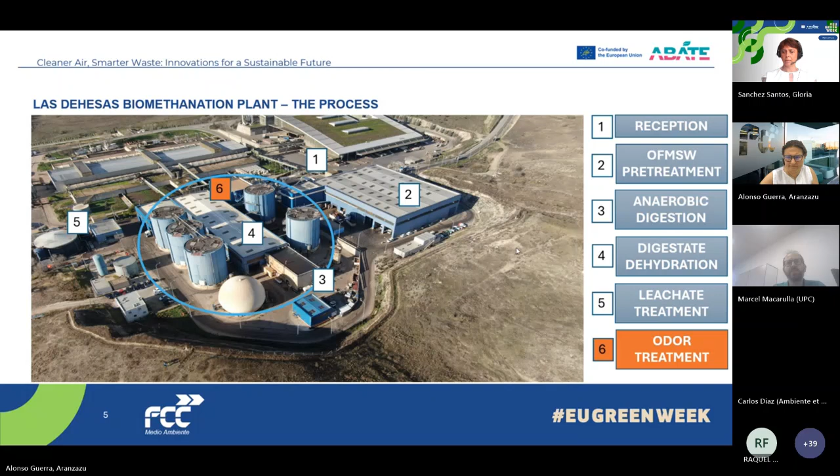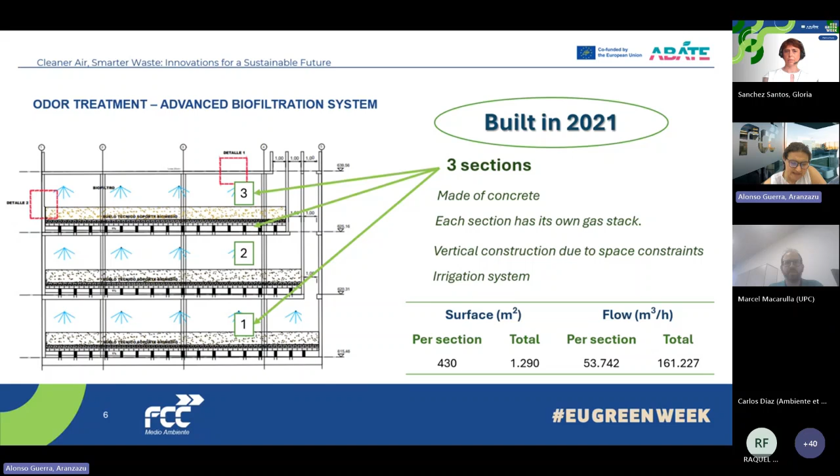The biofilter is an advanced biofiltration system and was built in 2021. This was a City Council of Madrid project to improve the deodorization system of the Valdemingómez facilities. The biofilter is a concrete building with 3 floors or sections identical in surface area and treatment capacity. The total surface area is about 1,300 square meters, with a capacity to treat up to 160,000 cubic meters per hour of air.

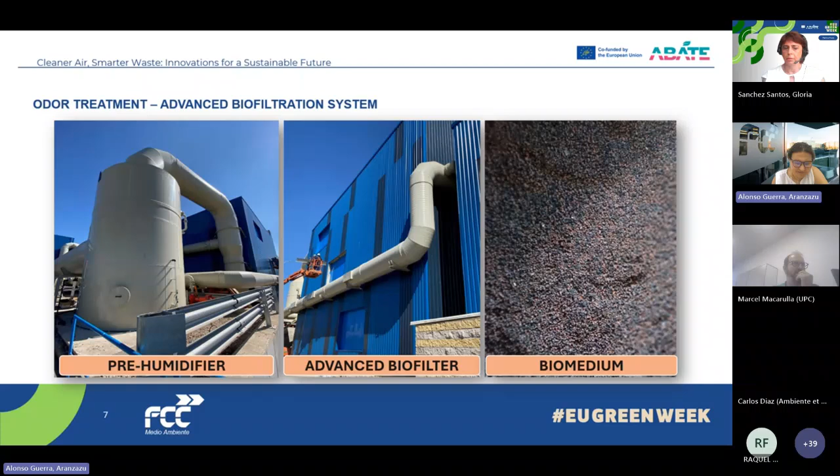The stream of air is extracted from the most problematic areas of the plant and first humidified in a scrubber to ensure that the air arrives in optimal humidity conditions and free of dust or particles that could inhibit the biological reaction inside the biofilter. The scrubber is a tank filled with a plastic material where the polluted air is countercurrently washed with water. This water is the permeate reused from the reverse osmosis in the leachate treatment plant. Once pre-humidified, this air is injected into the biofilter and distributed in the 3 sections.

The biomedia is an inorganic clay covered with specific microorganisms that oxidize the gases present in this polluted air, transforming them into CO2. This biomedia is the key for this advanced and innovative deodorization technology. And this is the biofilter that we use now in the plant.

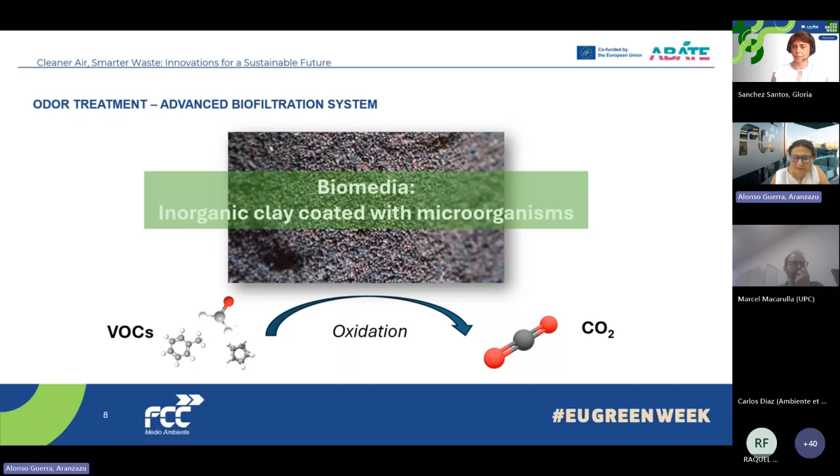But we are participating in this innovative Abate project. In the plant, I+Dehesas is the name of our research and development center. The objective of this center is to promote research and development projects like Abate, and we install prototypes for value-added processes, services, and products. Several projects are currently underway. One of these is the Life Abate project, which aims to reduce VOC and other emissions, and also reduce the operating cost of the deodorization system, as Raquel has explained very well. In addition, it will transfer the CO2 produced to a greenhouse for agricultural use.

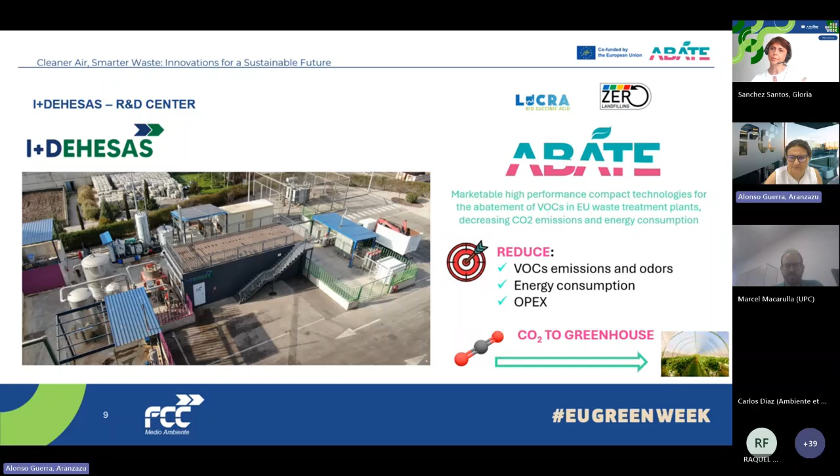The Abate solution to be installed at a biomethanization plant in Las Dehesas will treat a flow rate of 20,000 normal cubic meters per hour at 35 degrees, loaded with VOCs. First, the stream will be passed through a particle filter.

Next, the stream loaded with VOCs is heated and concentrated. The outlet stream will be at 52 degrees and 10 times more concentrated, so that the flow rate to be treated will be 10 times lower. This stream will be treated in a two-phase biotrickling filter through biological degradation.

Finally, a percentage of this treated air free of VOCs will be sent to a greenhouse for use in agriculture, vegetable and ornamental plant cultivation, to use this CO2 for the growing of these agricultural crops.

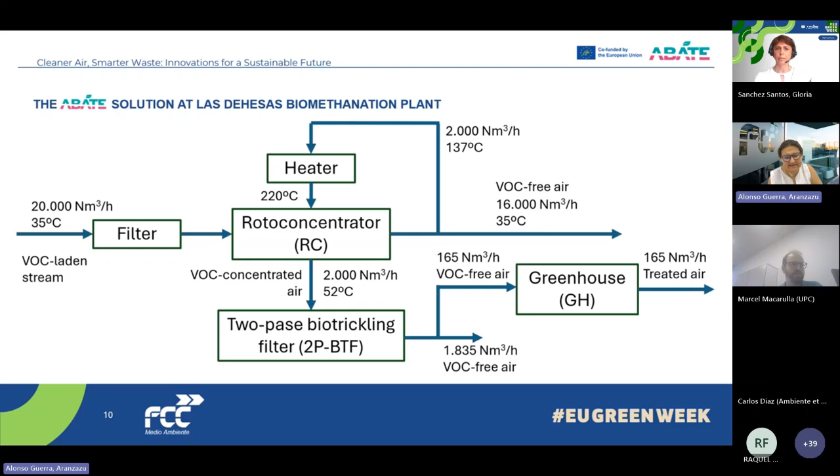The rotary concentrator is the first equipment with a great importance in this process, and is where the concentration of the VOC stream will take place. The most important advantage of concentrating this stream before cleaning is the reduction in the volume of air to be treated, decreasing the size of this equipment, and therefore the investment cost and energy consumption of the treatment is also reduced.

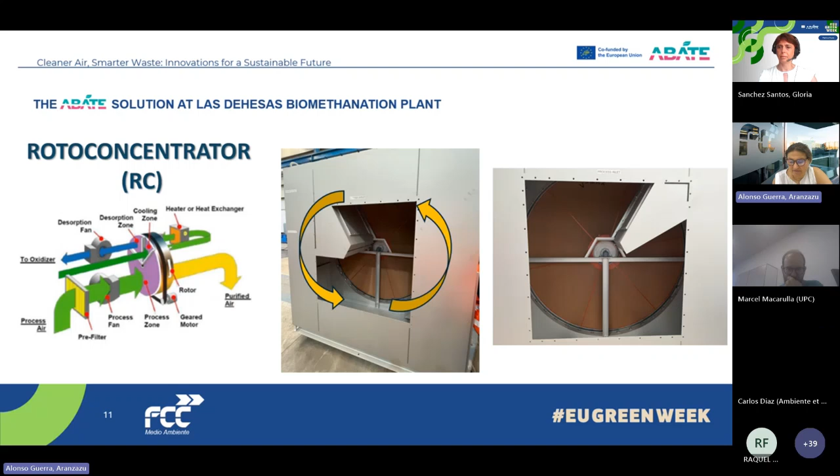Also, the system is more compact and saves space. The equipment is easier for installation in the plant and dismantling if it was necessary to move to another place. And greater system efficiency is expected. As we concentrate the VOC stream, we allow the system to operate closer to its optimal load range. And this will increase the removal efficiency, we hope.

The concentrated air will be treated in the biotrickling, that is a biological VOC treatment system. Here, the polluted air passes through a bed of inorganic material irrigated with a solution rich in nutrients and microorganisms. When the airstream passes through the bed, the pollutants dissolve in the liquid recirculated inside it. The microorganisms present in the biomedia oxidize the contaminants into non-toxic compounds such as CO2.

The biofilter has some operational advantages. Unlike biotrickling, it does not require liquid recirculation. It's easier to operate and does not require liquid effluent management or purging. But the Abate solution has several strengths worth highlighting. Operating parameters, pH, nutrients, contaminants, and temperature are better controlled in biotrickling, we hope.

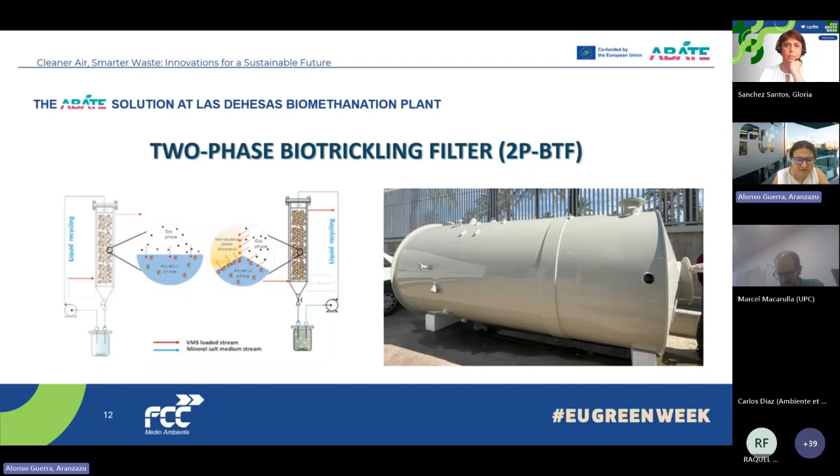Biotrickling supports higher loads of contaminants, such as VOCs and acid gases. Biotrickling is more stable. It does not dry out or clog easily. And biotrickling performs very well when the load has high variability. After biotrickling, the air stream rich in CO2 will be used in this greenhouse agriculture, and this also reduces greenhouse gas emissions to the atmosphere.

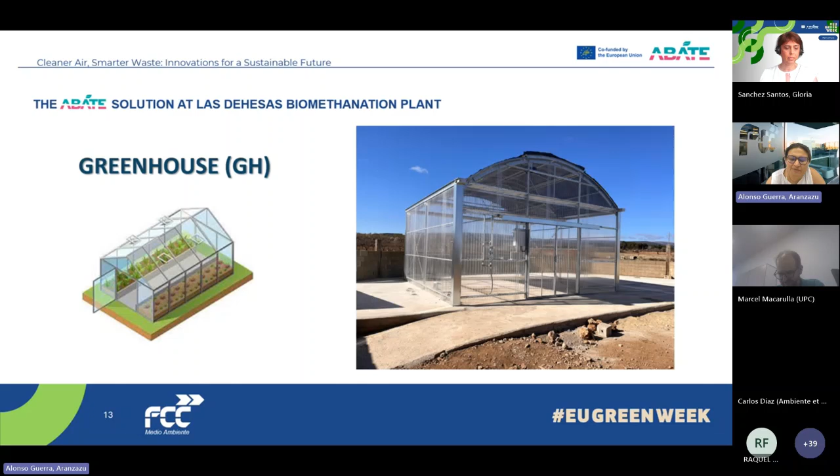Current operation in our biofilter... Arantxa, one minute, sorry. Okay, one minute. One minute.

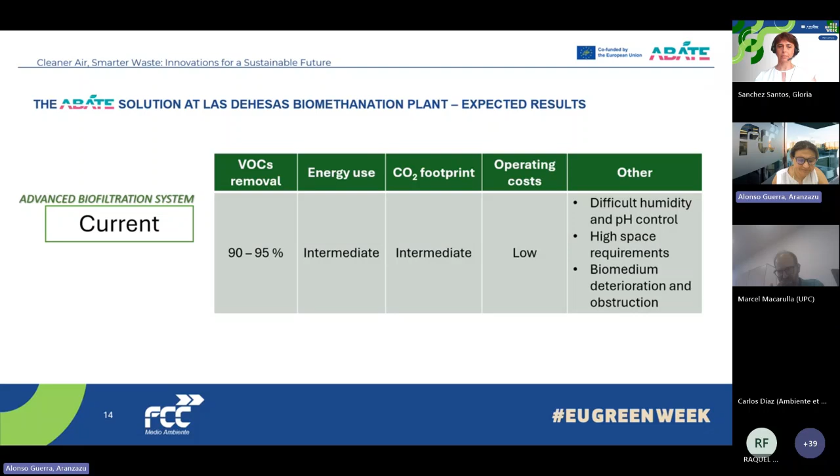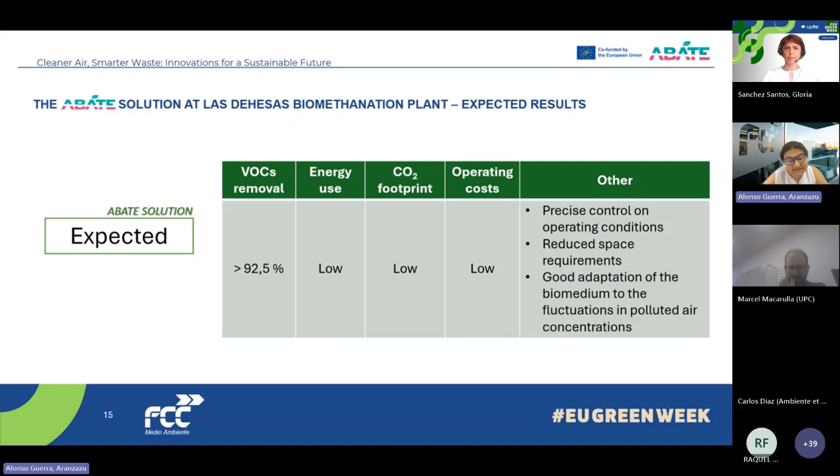Plant R. We have an efficiency of between 90 and 95 for the removal of VOCs, an intermediate energy consumption and carbon footprint, low operating cost, but some difficulty in controlling operating parameters such as humidity or pH. What we expect in the Abate solution is a similar VOC removal efficiency, 92, an important reduction in energy consumption and carbon footprint, lower operating costs, and to resolve some of the operation problems that we have now in the biofilter.

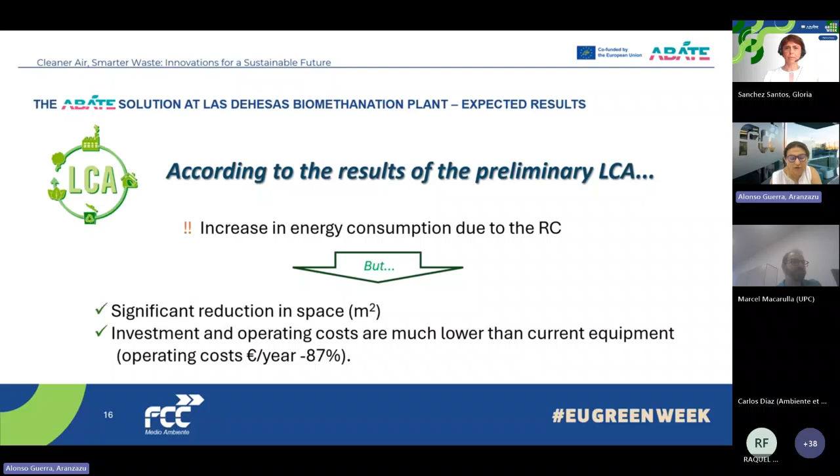The preliminary LCA analysis suggests a high possibility of an increase in energy consumption due to the rotary concentrator, although it considers the reduction in the footprint in square meters and an annual saving of around 87 in operating costs. Compared to the current equipment, it's a very significant difference, and a compact system requires less maintenance.

Now it is necessary to validate this technology and obtain experimental results when the prototype is put into operation in Madrid. The design of the equipment and the preliminary LCA analysis suggest that the Abate solution at the Las Dehesas biomethanization plant could be viable and competitive for replication in other mechanical and biological treatment plants for municipal solid waste.

In summary, the solution proposed by Abate offers big advantages for deodorization. One is reduced space occupation and lower footprint. Two, long lifespan of the packing material of the 2P-BTF compared to a conventional biofilter. Significant energy savings, minimal operation costs, a totally automated system, good adaptation of the 2P-BTF biomass to fluctuations in polluted gas concentration, and environmentally friendly technology.